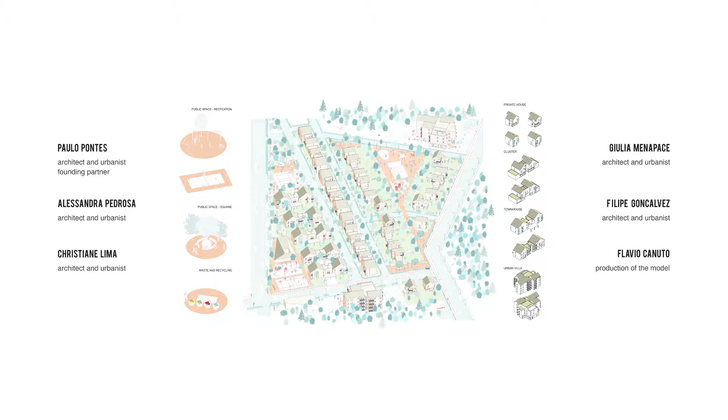PPA Arquitetura is an architecture and design office founded in 1987 with a team of architects, designers, and partners, constantly updated, focused on providing service with quality and innovation. For this project, the team was composed by a group of architects and urbanists: Paulo Pontes, Alessandra Pedrosa, Christiane Lima, Giulia Menapace, Filipe Goncalvez, and the production of the model Flávio Canuto.

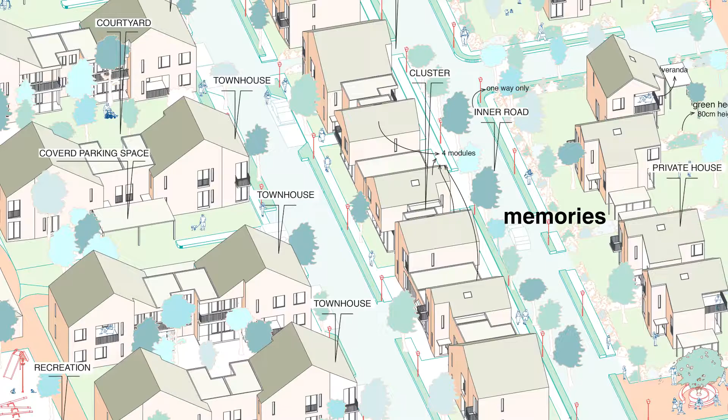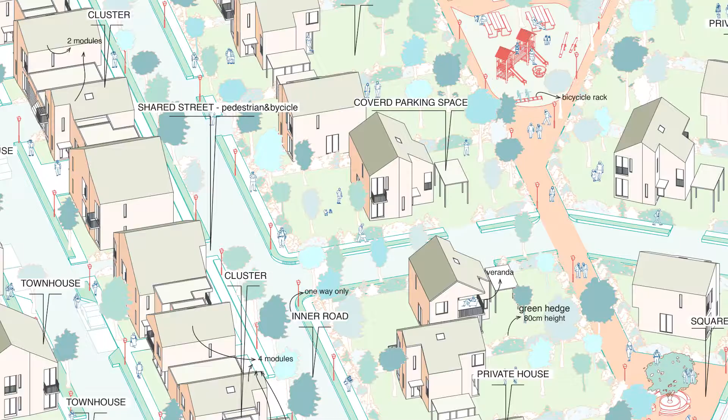The proposed urban block seeks an ideological, formal, symbolic, and functional symbiosis with the existing city. This is not only a continuum of their spaces, but also built with the feelings and memories that lend themselves in their streets, squares, monuments, and walls. The new neighborhood is not created to propose a different way of living, but rather influenced by the experience and memories of the city. Create an urban space and decent housing in the resulting form.

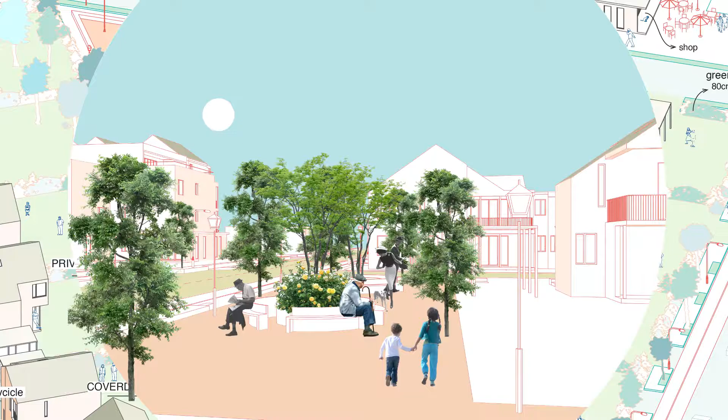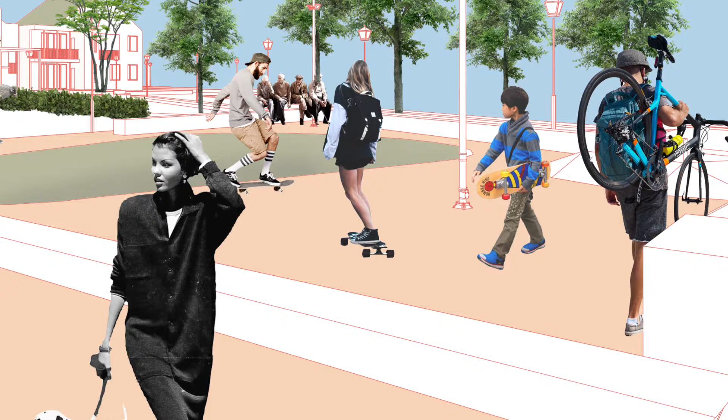The urban block looks at the surroundings and appropriates the rest of the city as much as the city will appropriate it. The new neighborhood to be designed fills empty spaces, recreates and adds new symbolic values to the urban space, and will pay great attention to the connection of the new with the memory that builds the social and historical fabric of the city where it will be built.

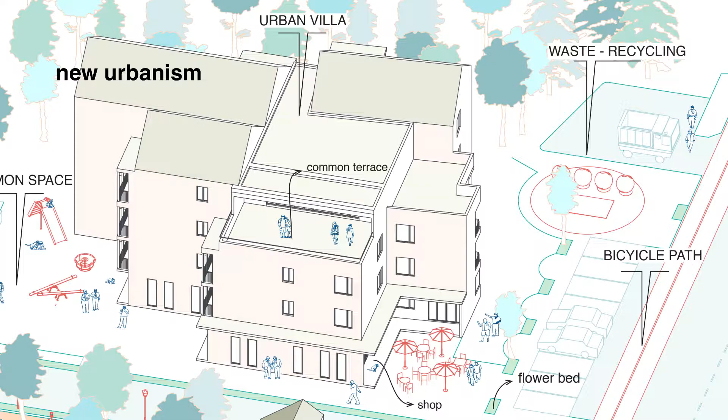It will be in this harmonious relationship between the existing and proposed city where there is the greatest challenge in the design of routes and hierarchies of routes and uses, making possible the connection with the pre-existing urban fabric and the affective memory of the Russian city. The urban design will enable the residents to participate in their construction and provide a decent environment and integration.

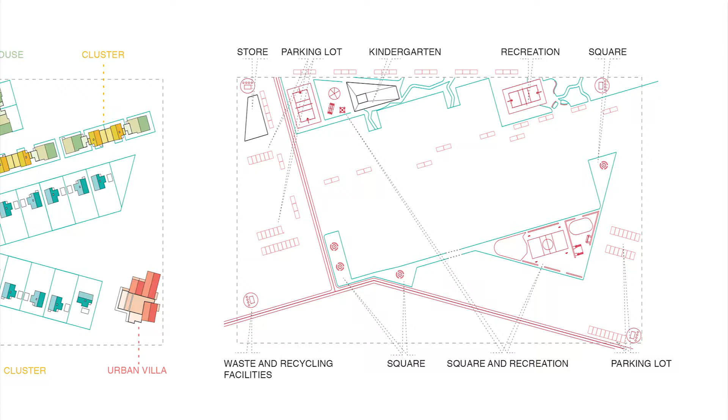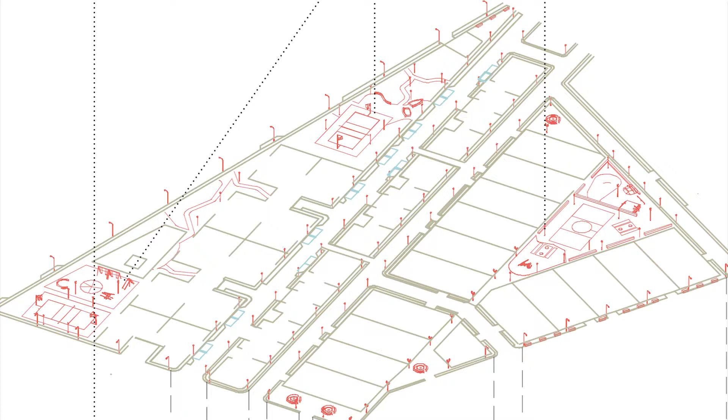And despite acknowledging the presence of the car, it seeks a shared road construction with a focus on the pedestrian and the cyclist. Two residential streets are proposed that make the direct connection with the city. The bicycle lane provides a safe transition between local traffic and the shared street that permeates the urban block, where it is possible for the population to build the street as an extension of the house and thereby make the roads and the urban block more secure.

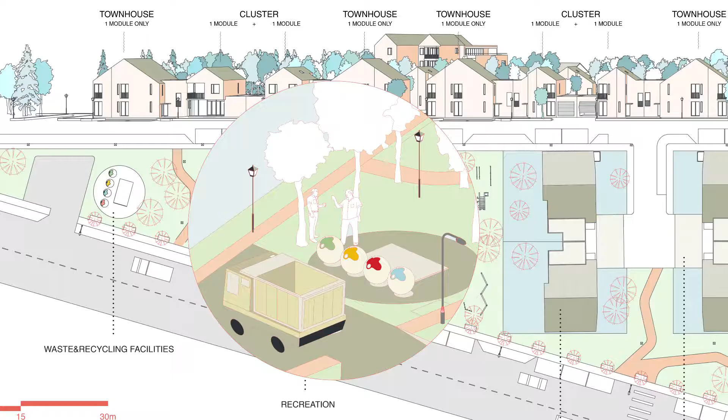In the urban space, there is a clear prevalence of voids over the solid. Those two add value one to the other in the sequence of small triangular squares interconnected by an imperceptible network of shared paths and continuous green areas. From the apparent complexity and multifunctionality of the urban villa to the rigorous implementation of the different typologies.

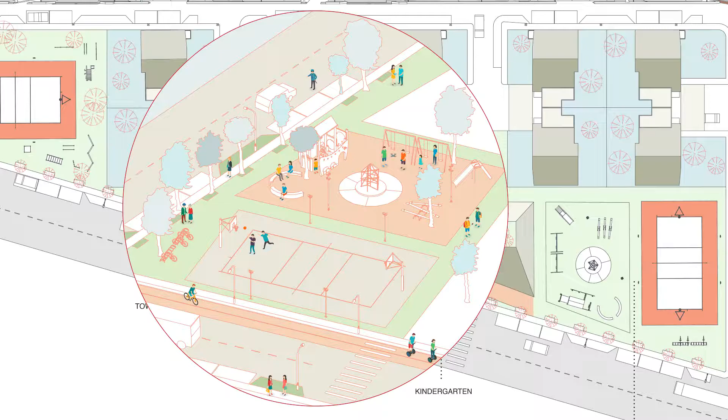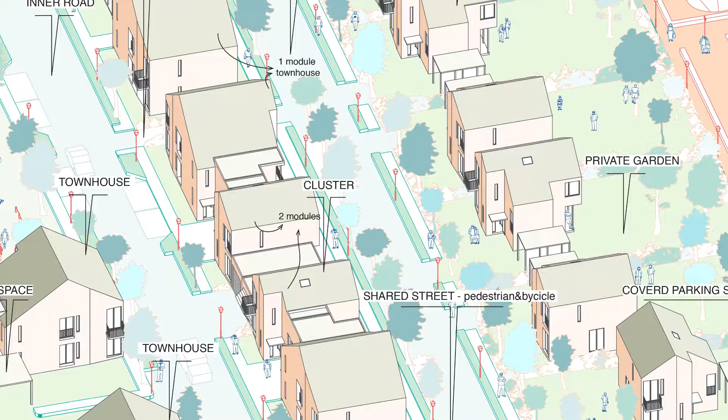The project privileged green and community spaces that permeate the entire urban block and reach the space constructed as a way of integration in which the buildings are an extension of the street as much as the street is a symbiotic extension of the buildings.

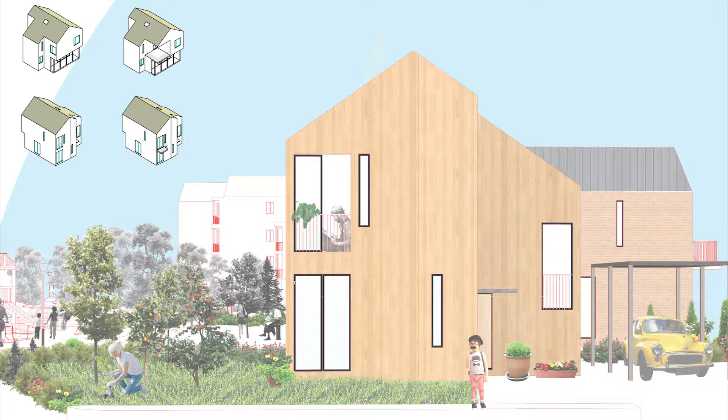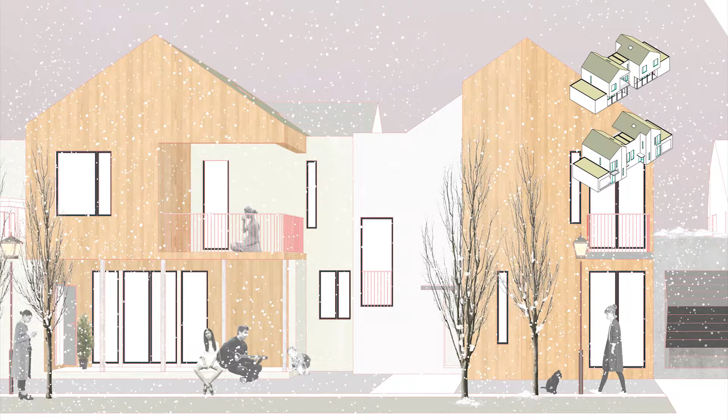Entries facing the local streets to offer more security. Two floors with access to a private leisure area. Entries facing the local streets to offer more security. Two floors with access to a private leisure area. Entries facing the local streets to offer more security. Two floors for residents with options with accessibility for disabled and elderly. Shared leisure area.

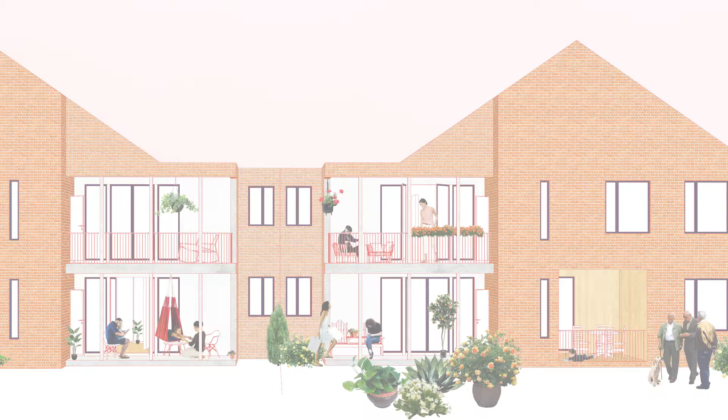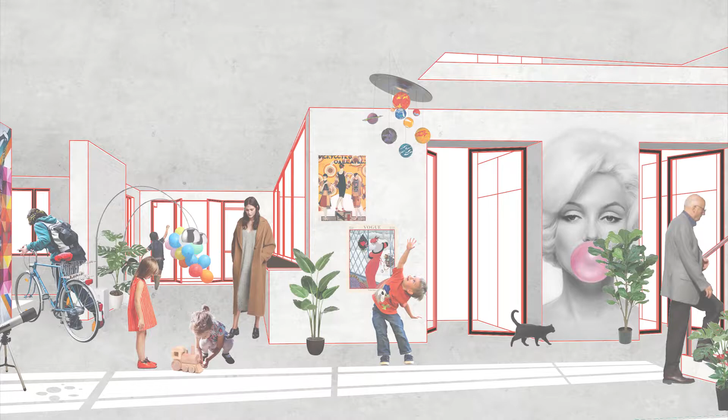Four floors dynamically connected by a staircase that functions as a meeting space that reaches the shared and wide winter and summer terraces. All the structure is abundantly illuminated by a glass wall that permeates the entire staircase.

Several typologies have been proposed. They are arranged around the common living space, abundantly illuminated with natural light. We understand the walls of each floor as focus and meeting potentials that culminate in the wide terraces.